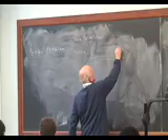If we have a bar like this and we apply a force, we call this a compression bar. In buildings, things that are vertical and are under compression are called what? Columns. Compression bars. Columns.

If you take a bar and you support it with some supports, this is a symbol of a support, right? And this is the pin support to hold moving horizontal and vertical. And you apply a load in here. What do we call this structure? Beam. They're beams, right?

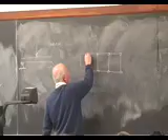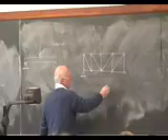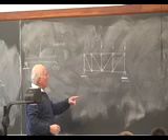Now, if you have a structure that is like this, and I'm going to put some bars. And I support at this point and at this point. And we apply some loads. This is called a truss. That's a truss.

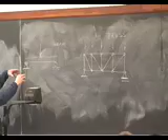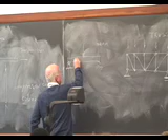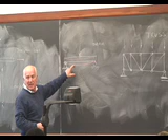Now, when you do bending, this beam bends, right? The beam bends. And the bending of the beam, the way this bends, right? This is a bent beam. Probably you have had a little background on that. The top fiber is under compression and the bottom under tension. Do you know that? When you bend something, right?

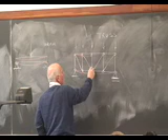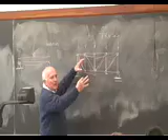Now, when you bend this truss, right, that will bend by straight bars, right? The top bar will most likely be under compression and the bottom bars will be under tension, right?

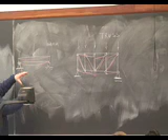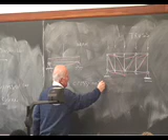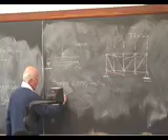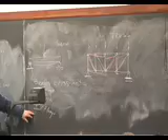In a beam, if this beam is made to be optimized as a cross-section, the most optimum cross-section for the beam is like that shape, like an I shape. Have you had that? Wide flange is what it's called - this is called the web, and this is called the flange. And when you bend the beam, the top flange is under compression and the bottom flange is under tension. And the web connects the top with the bottom, right? You have to connect somehow.

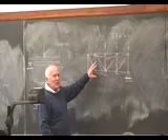So, in a truss, we have similarity to the beam because the top will be under compression, the bottom will be under tension, and these verticals and diagonals will be like the web in that beam.

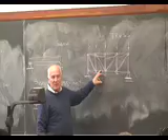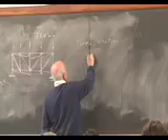So now, for the purpose of understanding structures, I would like to show how we can compute forces in a truss structure. When I say force in a truss structure, you can see this is made of many bars - they are called members, right? So, the truss structure - the basic is a triangular.

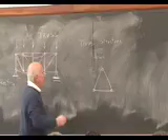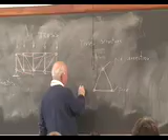If you take 3 bars and imagine that you have a pin connection in here. What does pin connection mean? Can you tell me what pin connection means? When you have 2 bars and you connect them, you call it a pin connection.

What's that mean? Only connected at one point that can rotate. That's called a pin connection. If you weld them, if you take 2 bars and weld them one to the other at the end, they cannot rotate freely.

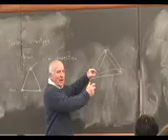But imagine that you have a bar in here. Let me do a little bit more. You have a bar, and another bar, and another bar. And if you put a hole in here, and a hole in here, and a hole in here, and you put a bolt or a pin, now you can see these are pin connected. But it's stable. If it's made of 3 bars, it's stable.

If it's made of 4 bars, and you put a pin over there, and if you apply a force from here, this is going to collapse. It's going to do like that. This is not a truss.

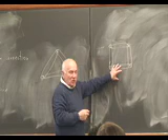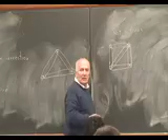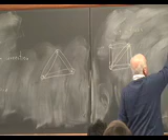How can you make that a truss? You just put another part. Now you make it a truss, right? And if I have this structure in here, I can have a triangle like that, and another triangle like that, and another triangle like that. So I have 1, 2, 3 triangles, and I get a truss.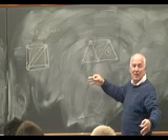And I can make many, and I have a big truss, big in terms of many members. But it can be very small. We can make trusses that are used in microchips, very little guys. Or we can make big trusses in a bridge, or in space. Space structures are made of trusses.

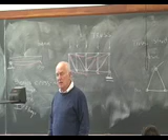Now, why trusses and not beams? Beams are stable too. Beams over a long span weigh much more as opposed to trusses, which keep their shape over a longer distance. So beams have a limitation. How long can you make a beam? Because it's heavy, it's all material in here.

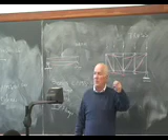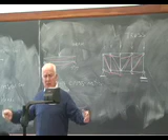If you make a truss, you take a lot of material out of this, and the truss is made of bars and can be lighter for the same load, to support the same load. So trusses can have a much larger span than beams do. Also, what I'm showing here are trusses, 2D trusses, in one plane, but you can connect in the other direction and you get space trusses.

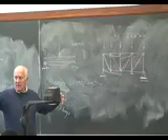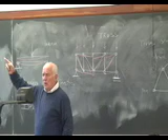When I was teaching some civil engineers, I used to take them to a building, Albertine building, where they play basketball, and they have some wonderful trusses designed about 15 years ago, new trusses. I like to just spend a minute and ask them to look up and see what a truss is. That was good enough for a lecture, because if you want to do something, you have to open a book, study, and learn how to design trusses.

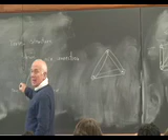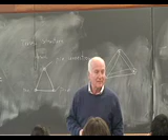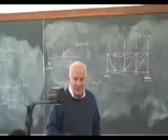So just so you know what a truss is. This is 15% of your tuition for today. You pay tuition? Much tuition. You know, when I teach the course, I tell my students, I'm joking, right? I just say that if you don't like by the end of the semester what you learn, go to Day Hall and ask for a rebate. I mean, for that course you should get money back, right? That would be nice to have professors at Cornell. I'm talking to the guy.

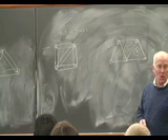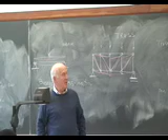So you already got something for your tuition today, you heard about truss structures. So I'm going to show you how we can compute forces in truss members. Am I allowed to assign homework? So I'll assign a little homework, put it on the web, and you'll be able to do that, and by doing the homework you are going to learn something. In this class you learn a little bit, but doing the homework you learn the real fact. Any question on truss structures?

Many applications in civil, in mechanical, and in many other fields you have trusses. They are light structures, they are the most modern structures, and also classical structures invented long time ago. They are still in use. Most people look at a truss structure typically when they see a roof on a house.

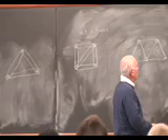If you have a house and you build something, this is a house, right? And in here you want to put a roof, it's a good idea to build something there like a truss. So this is a truss. You can give a little edge in here to create the eave, and you build a shed.

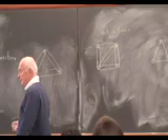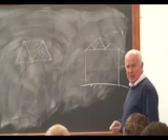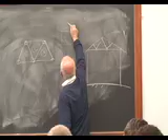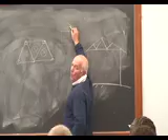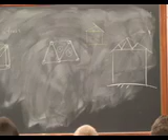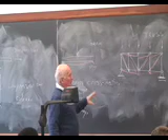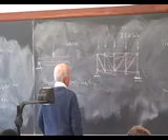Anyway, let me go to the basics of how we compute forces in truss members. What we learned so far is that because the truss under these loads will bend like that, some members are under tension, some members are under compression, and these diagonals can be tension or compression.

So let me do the computation of determining force in a truss member. For the purpose of the level of intro to mechanical and aerospace engineering, I would like to assume that we talk about statically determinate trusses. What does statically determinate truss mean? You never heard about that, have you?

You learn that in 2D, in plane structures, we have equilibrium equations in a system of forces x and y. If I put a structure in here, I can say that summation of fx should be 0, summation of fy should be 0, and summation of m with respect to a z-axis should be 0. You have 3 equations, remember that? Have you seen this before, when you did the reaction for these beams?

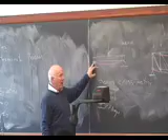Do you understand this symbol for the beam? This is called a support. Typically when I make it like this it means a roller that can move horizontally. When I make it like this it means a pin that is fixed in terms of displacement but can rotate, so the beam rotates. We can compute, we have this equation, and we have to find forces in this truss. So let's take a truss.

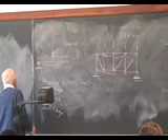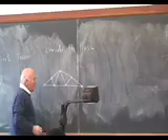So consider the truss. I sketch a little truss in here. By the way, these trusses have names depending on who made them first as a sketch or published something about it, but that's irrelevant. So this is a truss. Let's assume that I put some forces in here at the top. I could have forces at the bottom if this truss is inside and you put pipes and hang weights here, but for simplicity, let's assume I support this truss at this end and at this end.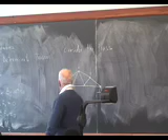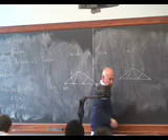So instead of that, I put this system in here. In some books you can see a little sketch like that, but this is called a roller, and this is called a pin. And you have forces — you've heard about free body diagram? So the free body diagram for that truss at this roller will be just a force like this, and at this pin there will be a force and another force.

So we have to give some names, right? So I prefer to give, let's say A, B, and I can go C, D, E, F, G, or I can say 1, 2, 3, whatever. I give a name to this guy and call it RA, and I give a name to this one RB, and a name to this one HB, horizontal at B. So you have 3 support reactions. These are called support reactions.

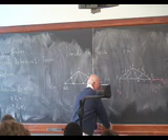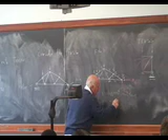And how many members do I have in here? 1, 2, 3, 4, 5, 6, 7, 8, 9, 10, 11 — 11 members, right? How many joints do I have? Joints: 1, 2, 3, 4, 5, 6, 7. So we have 3 support reactions, 11 members, and 7 joints or nodes.

Now, the support reactions and, in each member, there is a force — tension or compression. So these are unknown.

Unknowns, right? And we can write 3 equations for every location in a structure. But because we have a pin here, the moment is always 0. So in fact we have only 2 equations per node. Right? 2.

So a statically determinate structure satisfies the following criteria: R plus M equal 2 multiplied by the number of joints, where R is the number of support reactions. So I have 3 plus 11 equal 2 times 7. 14 equals 14. If you meet this criterion, the truss is called statically determinate, right?

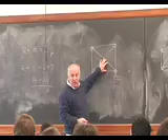So for example, if I have this truss... this is a truss. This is a statically determinate truss. But nobody stops me from putting another bar. I put another diagonal, I make it better, right? This is statically indeterminate. In order to solve this, you need knowledge from what we have a little background in, M&A 170. Understood? So we talk about statically determinate truss.

Now, how do we compute support reactions for this truss? How do I compute RA? I put some forces over there, I want to compute RA, right? And RB and HB. Let's take the easiest one, HB. How do I compute HB? I have these equations.

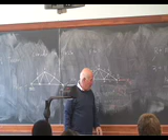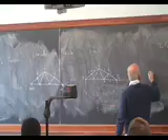If I say summation Fx equals 0, meaning all forces on the horizontal should be 0, can I see HB equals 0? So I can compute from summation of Fx equals 0, resulting HB equals 0. From summation of M with respect to B equals 0.

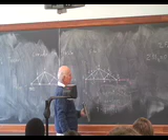M at B. Imagine that you have a Z axis in here. This is X and Y, and Z is perpendicular, right? So I put the system in here, with Z perpendicular. I say MZ at B, but typically we just say MB. That means the moment with respect to the Z-axis at B should be 0.

I have RA multiplied by something, and I have these forces multiplied by the distance, right? That will result in RA. Summation of M at Z at A equals 0 to result in RB.

So I use Fx, and I use M twice, right? And I solve the problem. As far as support reactions, I can verify if I'm correct by checking if it satisfies summation Fy equals 0. So I take RA up, RB up as positive, and P1, P2, P3 as negative—they should sum to 0, right? That is how I compute support reactions.

How do I compute forces in this member? There are two methods.

Can you stop that clock a little bit? No? It's raining outside. I don't want to go anywhere, unless you want lunch or something.

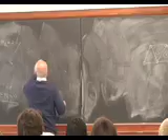So, method of joints. You take a joint, let's say joint A. Imagine that you can take a free body diagram of this joint, right? This is the free body diagram.

And you put the force in here that you computed before, RA. You take a system of coordinates in here, X and Y. You give a name to this, AC—this is the force F in member AC. This is F in member AD, FAD. And this is a pin in here, right?

And I can say summation—this is alpha, which you know from the geometry of the truss, right? And I can say summation of Fy equals 0, right? Give me FAC sine alpha—the other guy gets cosine, sine alpha—plus RA equals 0.

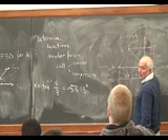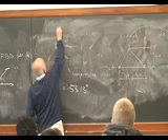So if I go to the next free body diagram for joint B, I just take it, and I put the force in here, 400 Newtons, and this guy, let me put it in red, this guy was FAB, minus 750 Newtons. And again, I do equilibrium of that node. Imagine that I have X and Y. I do equilibrium and I solve for FBD and FBC. So you go from joint to joint.

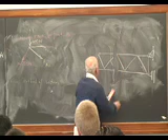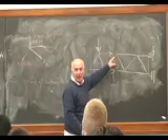There is a simpler method, also called the method of sections. If I have a truss like this, I can cut the truss in here and I can have a free body diagram. And I have a force in here. And I take the equilibrium of this guy, and I can solve the problem. And I don't have to solve this joint, that joint, that joint to get in here. I can go anywhere in a truss. That you'll see in 202. Thank you and good luck.